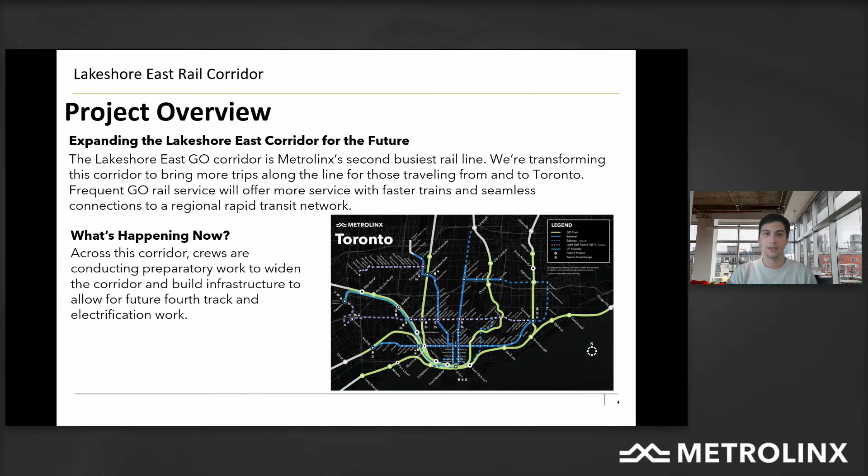Thanks, Adrian, and hi everyone again. It's Sherry Malikzadeh. I'm a project manager of the Lakeshore East Package A Early Works at Metrolinx, and I'm happy to present this project and give you a little bit of overview of what will happen in the close future in the Birchmount community.

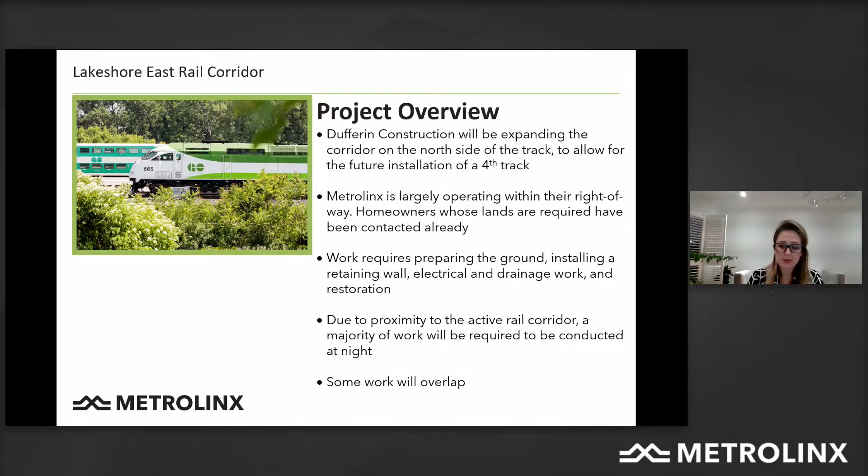Due to proximity to the active rail corridor, the majority of the work will be required to be conducted at night, and at some point some work will overlap.

For this project, we identified two main access roads, and it's good to say that none of them are in residential areas. One access road on the east end of the project is located at Kennedy Road, close to Kennedy Bridge, and the other one is located on the west end of the project limit, which is Milne Avenue.

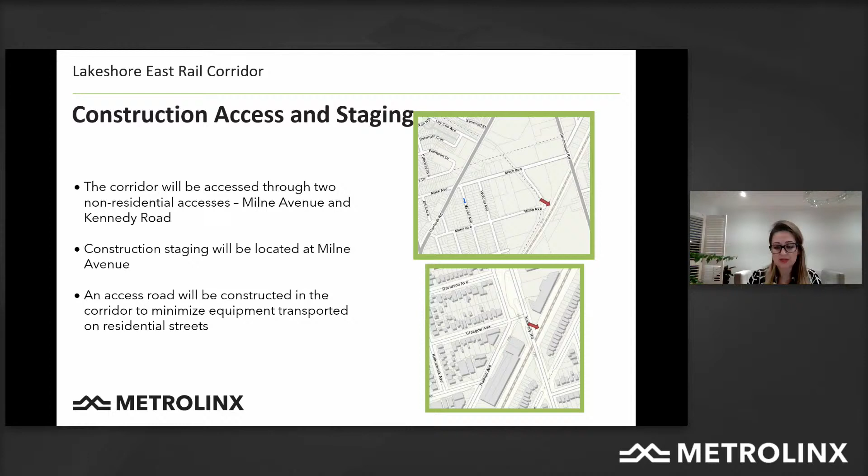Our identified construction staging for the term of the project is located at Milne Avenue. An access road will be constructed in the corridor to minimize the transportation of construction equipment on residential streets.

About the construction activities, we start with some prep work, and then after that we will move on to main and major construction activities.

As part of the prep work, we have the vegetation removal. This activity means we need to remove the trees and shrubs identified to be removed on the north side of the corridor where the project will happen. By removing these shrubs and trees, we will have enough space to perform the construction and do the grading, and also have enough space for building the retaining wall, and it helps in the widening of the corridor.

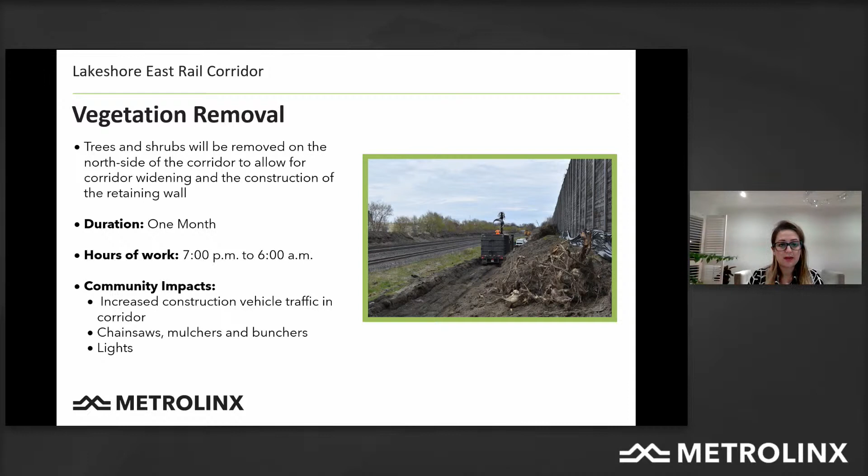That talks about another prep work, and it's about the construction of access roads. A roadway will be constructed from the two identified access roads, one at Kennedy Road and the other at Milne Avenue, to the project limit.

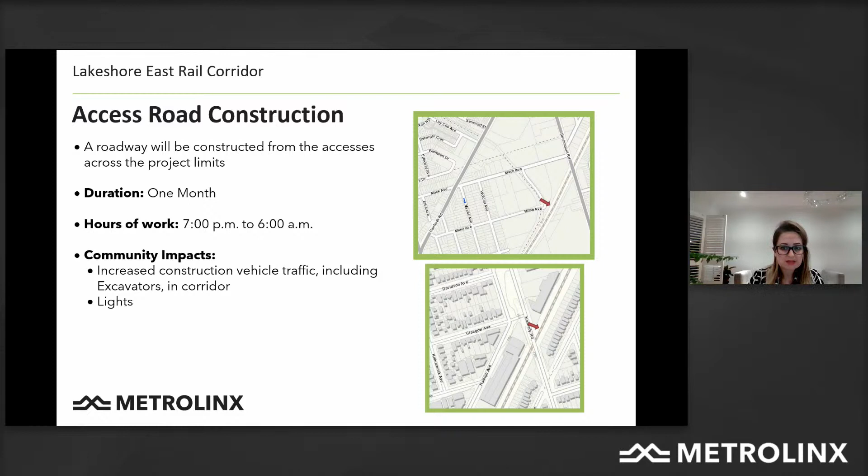After completing the identified prep work, construction access roads, and vegetation removal, we will have the major construction activity. This will have excavation as one of the main items. We will do excavation for different aspects of the project, like grading and building the retaining wall.

It means we need to remove the excess material and earth to level the ground and allow for the installation of the retaining wall. After that, we need to move on to the grading to prepare the future fourth track bedding. This activity will run from east to west of the project limit. At the east side we will have Kennedy Road, and on the west side we will have Walcott Avenue.

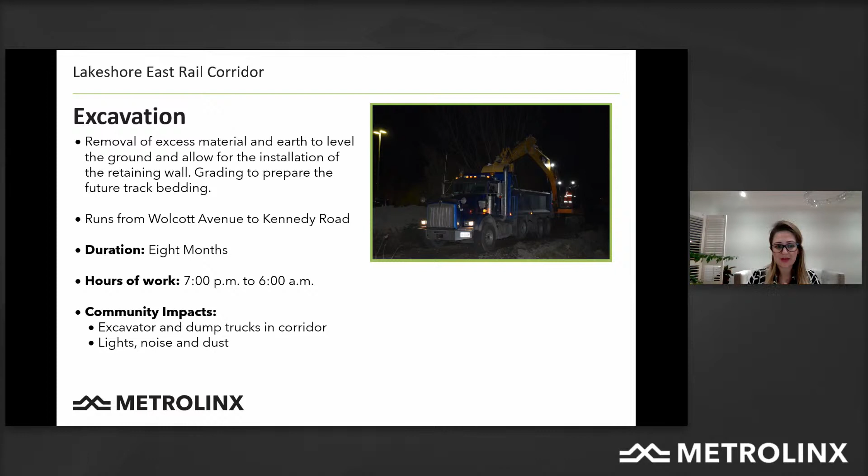After excavation, we will do the retaining wall. Piling is one of the main activities for construction of the retaining wall. In the piling phase, we will drill holes deep into the ground, and after that fill them with concrete to support the H-beams as the basis and support for the retaining wall.

We will utilize the drilling method, which is quieter and creates less vibration compared to the pounding method. The retaining walls will be installed from east of Milne Avenue, located on the west of the project limit, all the way to Kennedy Road, located on the east end of the project limit.

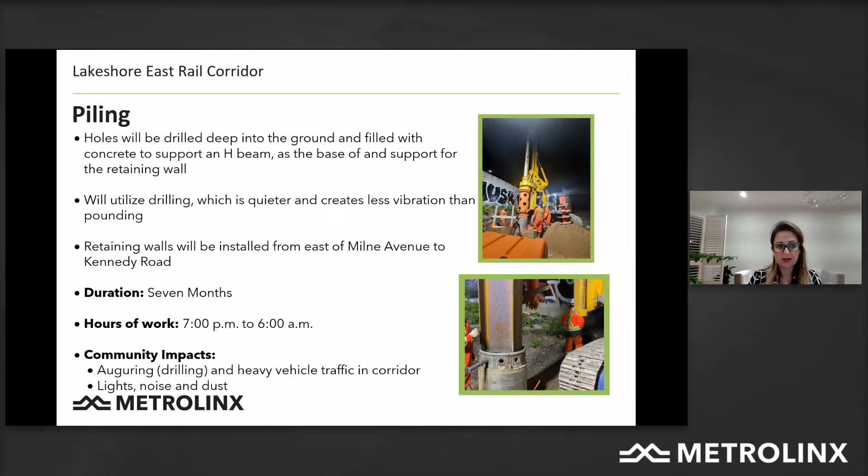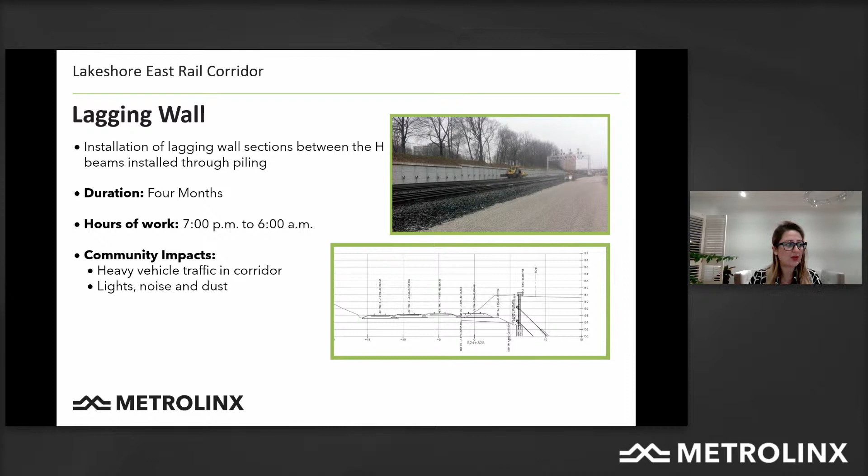After the piling, we will move on to the lagging wall, which is installation of lagging wall sections between the H-beams that we installed through the piling process. After doing the lagging wall, we will move on to the next step.

After that, we will move to the next step, which is the grading, because we have the support for doing the grading. The grading means we're going to place the granular base for the future track on an expanded area on the north side of the corridor and install the subsurface drainage.

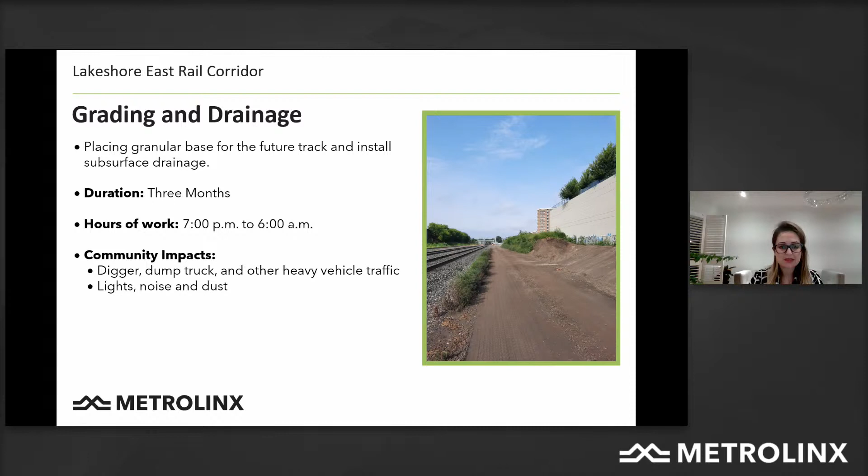The last activity, after doing the grading and when we are almost close to the end of the project, is the restoration. Metrolinx, in collaboration with TRC and the City of Toronto, identified all the restoration requirements, and we did the restoration and compensation to meet all the requirements. There will be no tree replanting within the Metrolinx right-of-way because of the future electrification requirements that will come after this.

In the previous slides where we walked you through the construction activities, you may notice that the timeline mentioned the work being done at night, and you may ask why. The reason for doing the work for this project at night is that the work is located very close to the tracks, and we have to work close to live tracks when we have train traffic.

Given this, daytime work would result in very frequent work stoppages, meaning a significant increase in the schedule of the construction and timeline, which would end up causing more noise for residents.

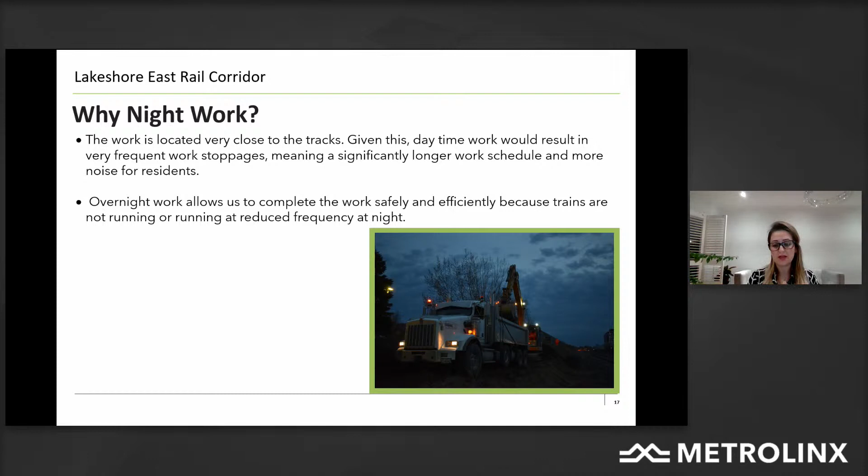So we came up with a plan to do the work overnight that will let us complete the work safely, which is really important, and efficiently, because the trains are not running at night in the corridor, or at some points or some days they will run at reduced frequency at night. This will help us have a better project in the safest way, with better productivity and efficiency.

Like all other construction activities, we're going to have noise and vibration, but Metrolinx and Dufferin have some mitigation plans, some of which are listed here, such as the policy we have in place for anti-idling equipment.

It means no idling of non-essential equipment. Also, Dufferin will attempt to reduce the duration of trucks reversing into the project site, which means minimizing the exposure of the backup alarms for the construction equipment.

Another item we consider is using white noise or broadband backup alarms on the trucks and construction equipment that will be on site for longer than 2 days at a time.

Another item we consider as a mitigation plan is working at night, which lets us complete the work safely and efficiently because trains are not running or will run at a reduced frequency.

The other item we consider is, whenever possible, Dufferin will route the trucks and construction equipment on main roads to avoid using the small residential areas. It will help minimize traffic in residential streets and residential areas.

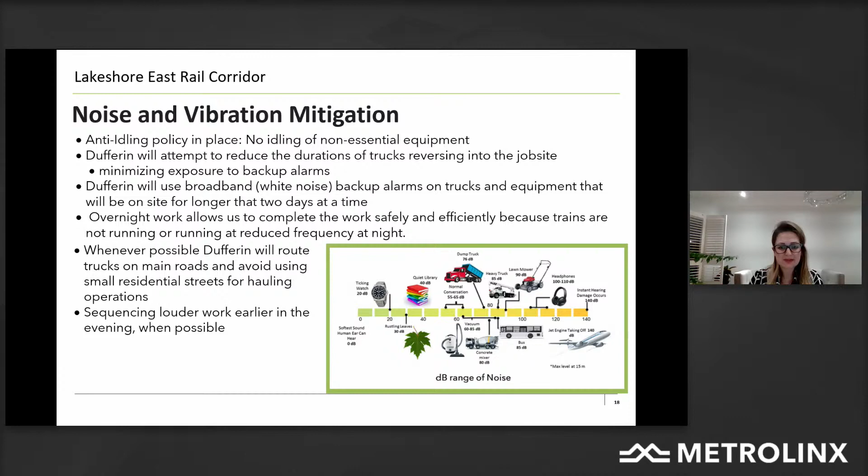And yes, we monitor the noise and vibration during the term of construction. There are noise and vibration monitoring devices located in each work zone. We read the data continuously, 24 hours a day, 7 days a week, and these devices are solar powered, with all data stored on a cloud service.

Dufferin and Metrolinx both have access to the data, and the weekly monitoring report prepared by a specialist will be submitted to Metrolinx to review. In case of an exceedance, Metrolinx will be notified within 24 hours by email from Dufferin or its contractor, and both Dufferin and Metrolinx will investigate to find the root cause and determine the best action required.

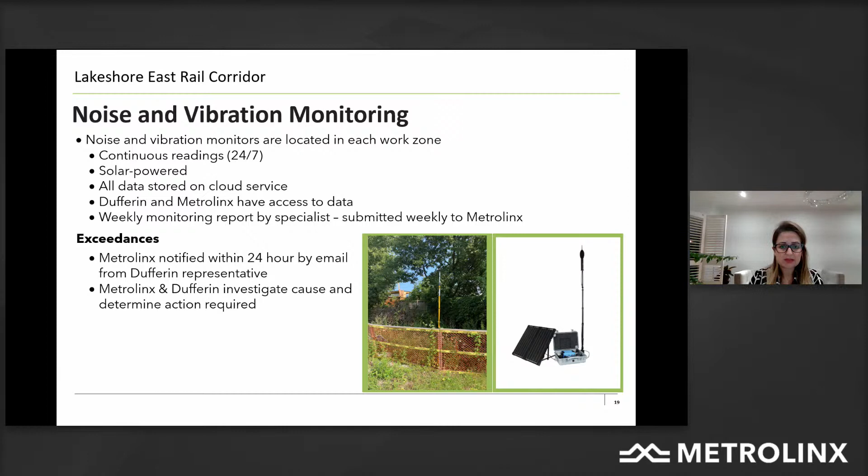Next slide, please. And I will hand it over to our friends on the Birchmount Bridge construction team. Thank you, everyone. Thank you very much, Sherry.

So, the Birchmount Bridge Reconstruction Project. My name is Anthony Olagunju, and I'm the project manager for this project. Let's explore some quick facts about this project.

This bridge was originally built in 1958, so it's over 63 years old. It supports 4 lanes of traffic - 2 northbound and 2 southbound.

While envisioning this project, the City of Toronto conducted an independent study to understand the condition of the bridge so we could make an informed decision. Metrolinx did the same as well.

What was the result of the independent analysis? It was determined that the bridge was nearing its useful life, meaning some of the bridge components are not very sound. So it was mandated, or the economic decision was, to build a new bridge.

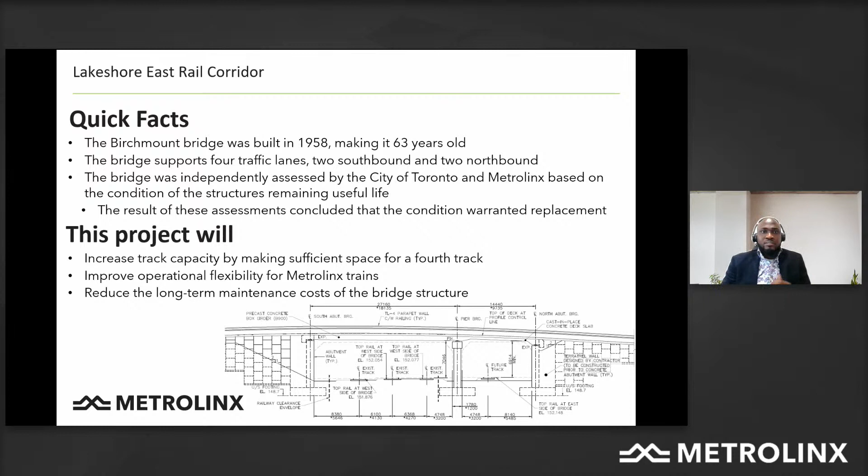And I did talk about the bridge nearing its useful life. So by replacing this bridge at this time, we're going to have lowered maintenance costs instead of going in every now and then to maintain it. So, the scope of work - what are we doing here at Birchmount?

Some of the key components of the work are: demolition and replacement of the existing bridge, building retaining walls on the north side, and we have a span about 150 meters in length. We're also doing grading for the 4th track, which spans under the bridge.

There will be utilities relocation, which we'll work closely on with the utility owners, along with a couple of civil works. It's important we also look at environmental due diligence to ensure regulatory requirements are met, and we've conducted that as well. There will also be property acquisition, mostly on the north side.

So what are some of the impacts we're looking at during the construction season? There'll be lane reduction. We worked closely with the City of Toronto because we could have shut the bridge down for a faster construction season, but we determined it's important that there's still access through Birchmount, so we're going to be phasing the bridge construction.

It will be phase 1 and phase 2. During phase 1 there will be a lane reduction, and when we switch to the other phase there will be lane reduction as well. We can also expect construction noise during the day, with occasional night work and weekend work, including full closures, but those will be very minimized.

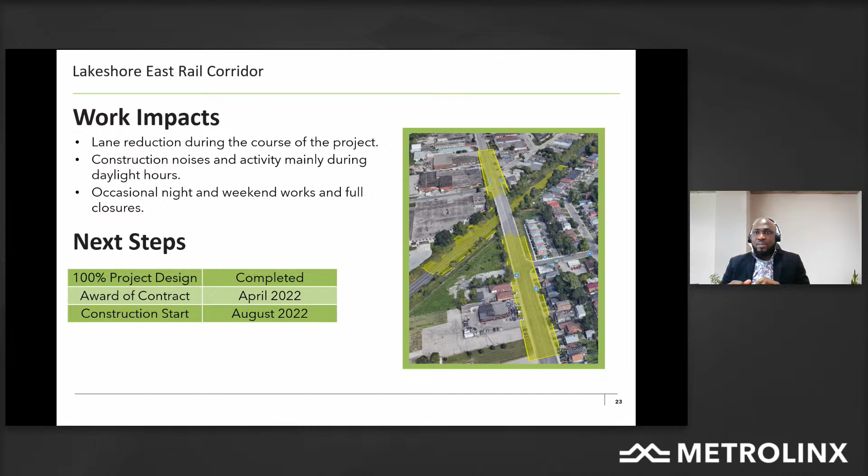Thank you, Anthony. My name is Caroline Danrath. I'm the Senior Manager for Capital Project Group. I oversee the vegetation removal to support the On-Corridor GO Expansion. Next slide, please.

So we are removing trees and shrubbery on the south side of the rail corridor between Wolcott and Kennedy Road. This is to support future electrification and to prepare for the installation of the required infrastructure. We have already commenced this work.

We started in the beginning of January, with a goal to finish by the end of March. Our contractors are working during the day and, when necessary, will work weekends. We're on schedule and hoping that we'll actually finish early. So, next slide.

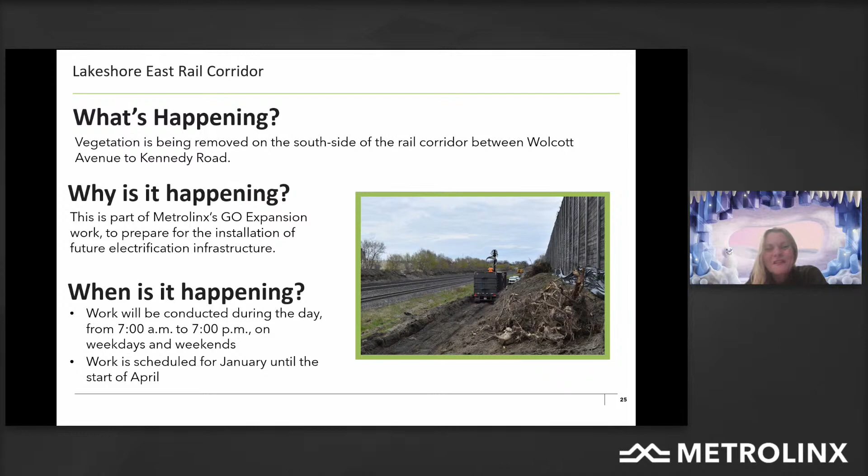I'll hand that over to Sung. Thank you, Caroline. My name is Sung Cho, and I'm the project manager for the utility relocation project.

We are currently relocating utilities, including fiber optic cables, from the north to the south side of the rail corridor to accommodate future corridor infrastructure for fourth track. We are working with utility companies to relocate their cables, including our own signals and communications cables that are vital for all trains, mainly for GO trains.

Work has been happening since fall 2021 and is expected to be complete by next month. Given the proximity to the track, work has to be conducted at night for the safety of the crews. We'd like everyone to know that Metrolinx is making every effort to complete this work and vacate Woodrow Park by the end of this month.

As soon as the weather permits, Metrolinx is going to resod the park before spring comes. And that's it for my project. Thank you.